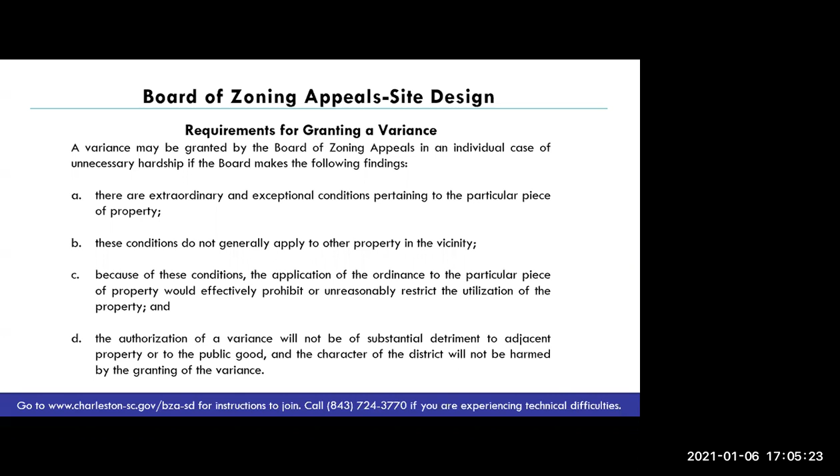For a variance to be granted, the Board of Zoning Appeals must make the following findings. A, that there are extraordinary and exceptional conditions pertaining to the particular piece of property. B, these conditions do not generally apply to other property in the vicinity. C, because of these conditions, the application of the ordinance to the particular piece of property would effectively prohibit or unreasonably restrict the utilization of the property. And D, the authorization of a variance will not be a substantial detriment to the adjacent property or to the public good. The character of the district will not be harmed by the granting of the variance.

Very good. Thank you, Joel. Order on each application. The chair announces each application followed by staff presentation and recommendation. Staff will call on applicant to present their application after being sworn in by the chair. Staff will open the public comment period to receive comments from registered attendees in favor, first spoken, then written. Each speaker will be sworn in by the chair. Staff will then recognize registered attendees for public comments in opposition after the speaker is sworn in, first spoken, then written. Staff will recognize the applicant for a short rebuttal, and then the chair will close the public comment period and begin board discussion.

Providing comment: if you submitted a request to speak on an item before the deadline, staff will call on your name when it is your turn to speak and enable your microphone. Your microphone will be disabled after you're done speaking. You may only speak once for each item, and you must state your name and address for the record, or you will not be permitted to provide comment.

Board discussion. Following public comment period, board members will make comments, ask questions, and make motions. After a motion and a second, board members will vote aye in favor or nay not in favor. If the vote is not unanimous, the chair will poll each member for their vote. The chairman shall announce the vote on the motion and the final decision on the application.

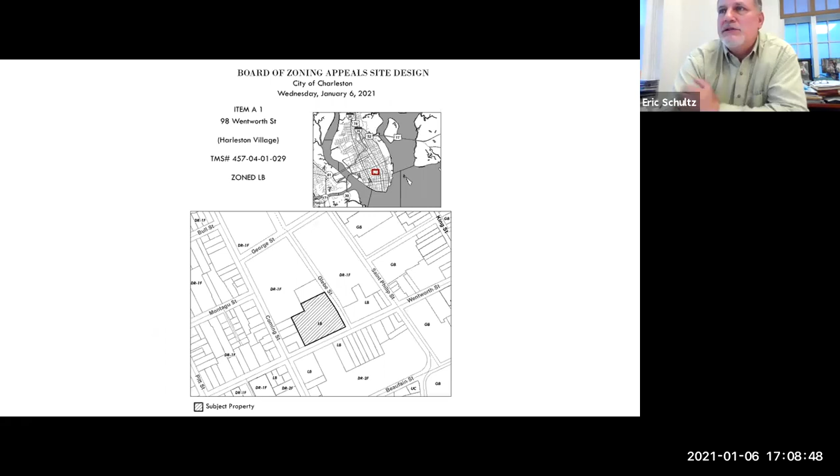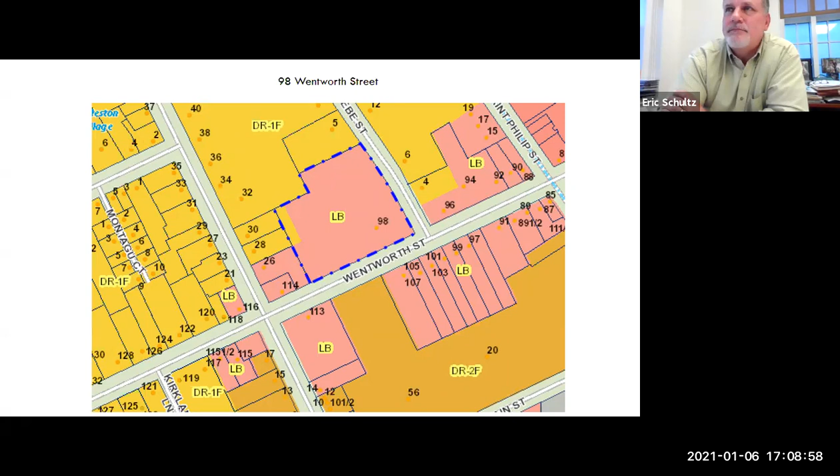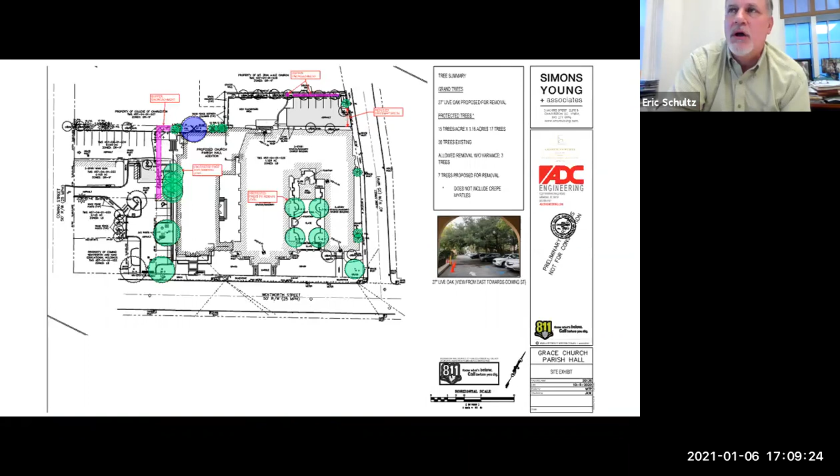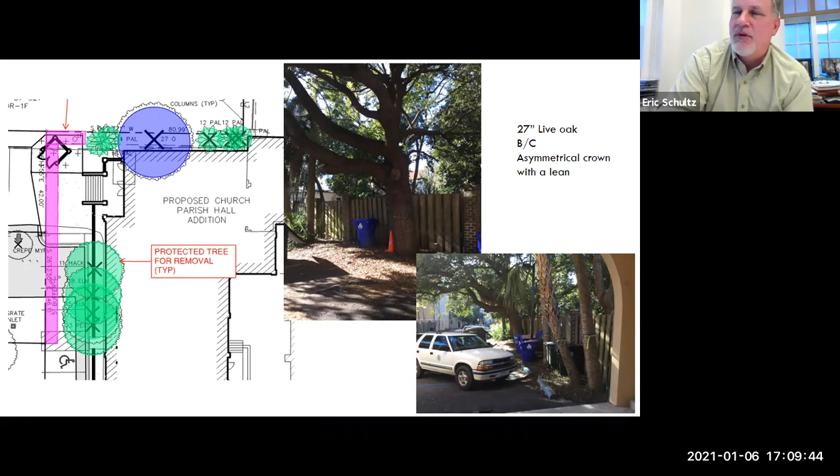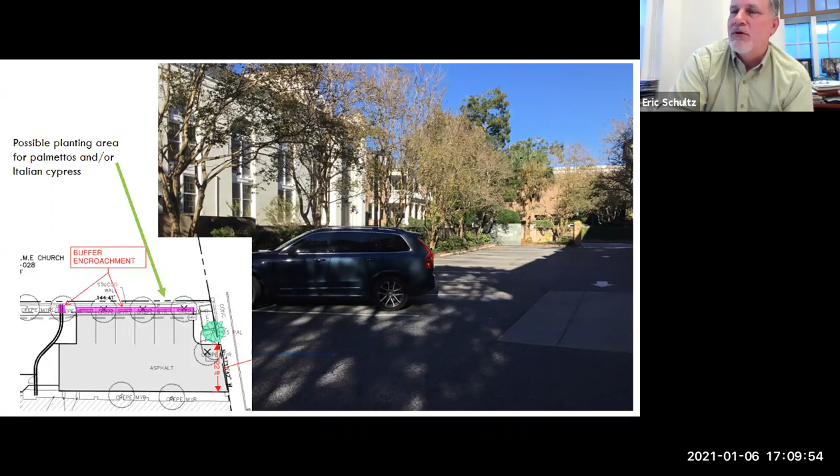This was an exhibit that I built for that other meeting, again, showing the 27-inch live oak, the trunk, and how the crown stretches into the existing parking lot, having an asymmetrical crown with a lean. This is a shot of some protected trees that were already addressed, and the small buffer area that was already previously addressed.

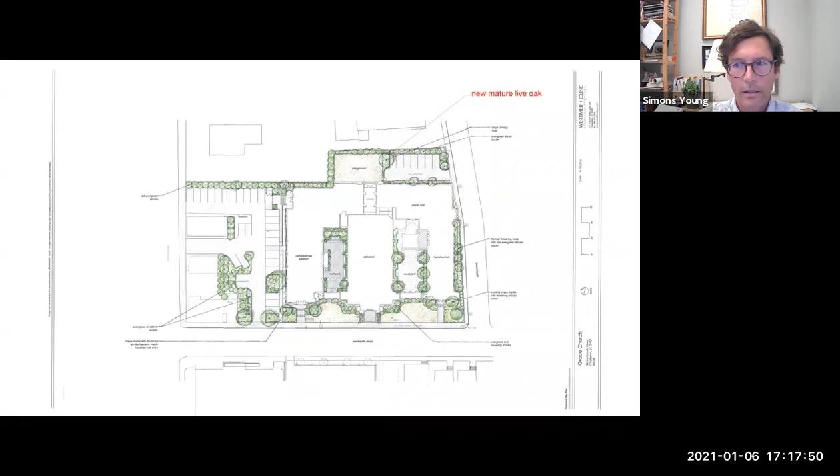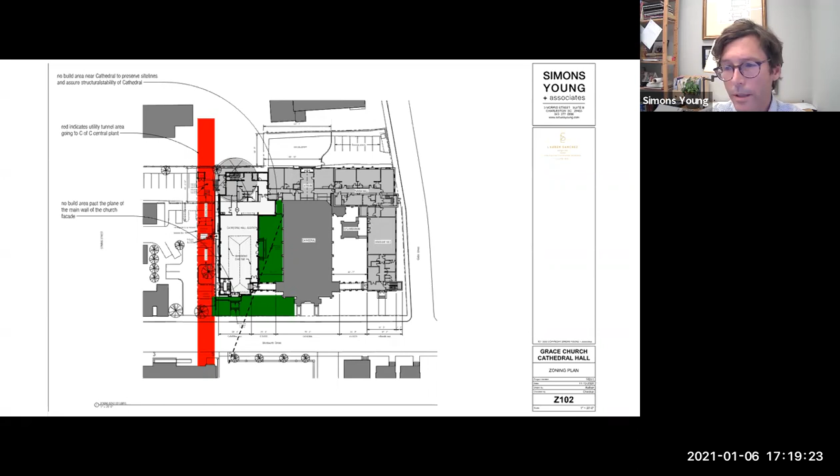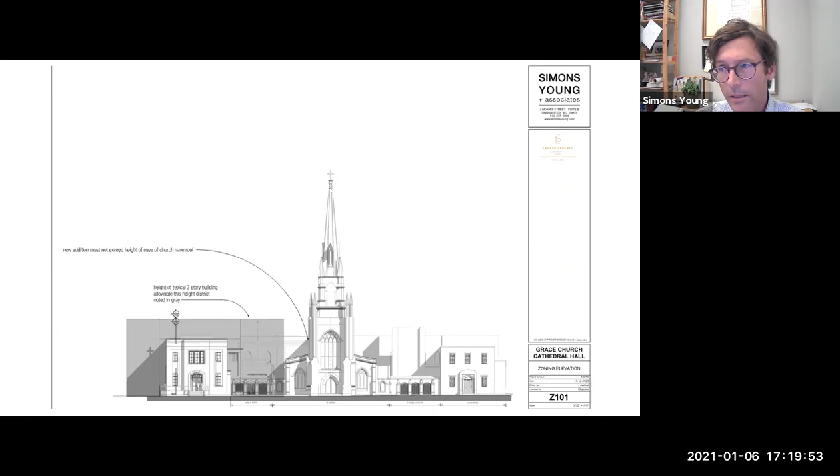Thank you, Simons. Is there a way that I can be increased to a panelist or whatever the terminology is? So... I'm not sure what you're asking, Brian. That was what I was asking. So you can see. That's it. Okay. Yeah. It just works better for me, I think, when we can all see each other. Yes. Gotcha. Okay. Thank you.

Chairperson Adrian and members of the Board of Zoning Appeals, I am Brian Hellman with Hellman, Yates, and Tisdale, 105 Broad Street. And I'd like to begin by thanking Mr. Schultz for his stellar overview of the application and the procedural history that brought us here tonight. And Simons, thank you for your overview. As Simons stated, I'll walk the board through the 4-part variance test and why we believe this application meets it, ultimately asking for your support and approval for this timely and important addition to the church.

Simons and the team have worked extensively with staff, with our neighbors, the College of Charleston, Harleston Village Neighborhood Association, and others to garner support for this project. And we want to thank everybody for their time and effort as well. Did I hear you correctly, Eric, that there was nobody registered tonight that was opposed to this project? That is correct. Nobody registered to oppose. Thank you.

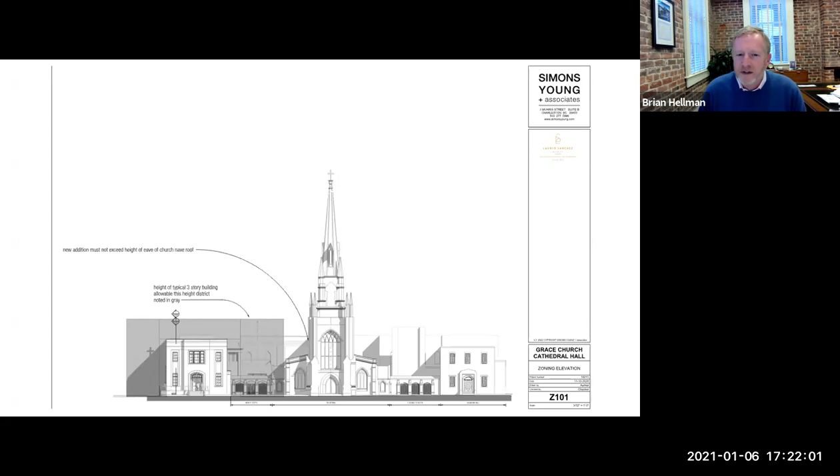So in South Carolina, to obtain a variance, an applicant must meet a 4-part test. We believe we meet this 4-part test for the following reasons. First of all, as Simons alluded to in his presentation, as did Mr. Schultz, there are extraordinary and exceptional conditions that pertain to this piece of property. They're the obvious ones, the lot size and shape, and how they're impacted by existing improvements. First of all, it's an oddly shaped lot, small and compact when one considers the membership of the church congregation, with only 600 seats, over 3,000 members, a preschool, and active ministry and outreach programs.

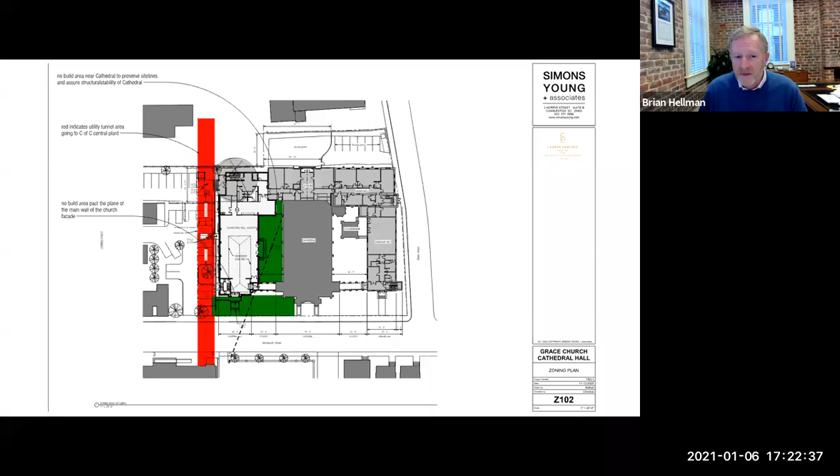To support these uses, as Simons also pointed out, the clergy offices and administration are located off-site in a separate building down Wentworth Street. A major goal of this project is to bring them all into one campus. That's made difficult by these extraordinary exceptional conditions, which are a function of the existing improvements. The Category 1 cathedral, rated the highest category in the city's historic evaluation system. Because of the nature of the historic building, the area in green where the sight line is shown is not only a gap for visibility, but it creates structural related issues, and the micropiles that are going to be necessary for the new addition must remain a certain distance away from the historic cathedral.

So it was constructed in 1848, and the 1855 plat shows the original church line on what was then 3 parcels. Over the years, the additions have been made to the west. Because of these existing improvements, the zoning ordinance imposes and the existing conditions create extraordinary exceptional conditions with respect to the siting of any addition. While, for instance, our zoning allows for almost 100% lot occupancy and a height of 3 stories, the proposed improvements may not occupy anywhere near that percentage on the site and are limited to 2 stories for the reasons that I had previously set forth.

The historic nature of the cathedral, the sight lines that Simons and Mr. Schultz pointed out, as well as the height of the cathedral. So under the city's ordinances that apply related to historic properties, the building must be shorter and smaller than the underlying zoning ordinance would allow. Additionally, this utility tunnel, what's in red here, owned by the College of Charleston, crosses through the western part of the site and makes building in that area impossible. So we're unable to build a wider building to avoid building the ADA and accessible areas in the back where the tree is because of this utility tunnel.

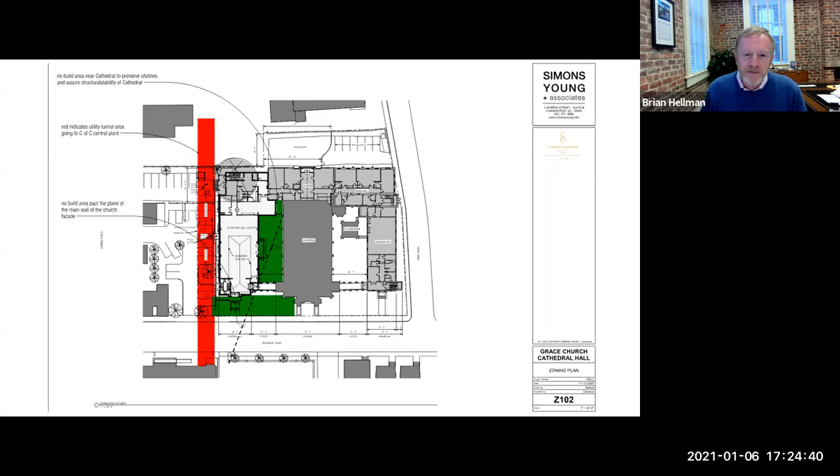The shape of the tree itself is also a challenge. It has grown mainly in one direction to the south, where it greatly impacts the buildable area of the site. According to my understanding, Mr. Schultz, this tree is at a C or a B- condition, and the roots continue to make the parking lot uneven. It regularly needs to be patched. The roots need to be shaved.

It's actually presently creating a somewhat difficult situation for the folks that are elderly and use that area as sort of an accessible way to get to the church as it is. It would make the area inappropriate for necessary emergency egress as people cross over it today or with the addition. So for those reasons, we think that we have some extraordinary and exceptional conditions specific to this property that do not, part B of the test, generally apply to other properties in the vicinity.

Specifically, the odd shape of the lot, the category rated historic building, utility tunnel, and the need for safe and efficient emergency egress. And for the reasons that we had stated already, part C, because of these conditions, the application of the ordinance to a particular piece of property would effectively prohibit or unreasonably restrict the utilization of the property due to the lot size, the shape, the restrictions, the 19th century improvements, the other conditions.

This single tree, which interestingly enough, the church having been there since the middle of the 19th century, we have this single tree that's probably maybe 30 or 40 years old that we're all here to talk about. It's merely a fraction of the age of the church, but this single tree is unreasonably restricting utilization of the property. And the last part of the test, that it will not be a substantial detriment to the adjacent property or the public good, and the character of the district will not be harmed by granting of the variance.

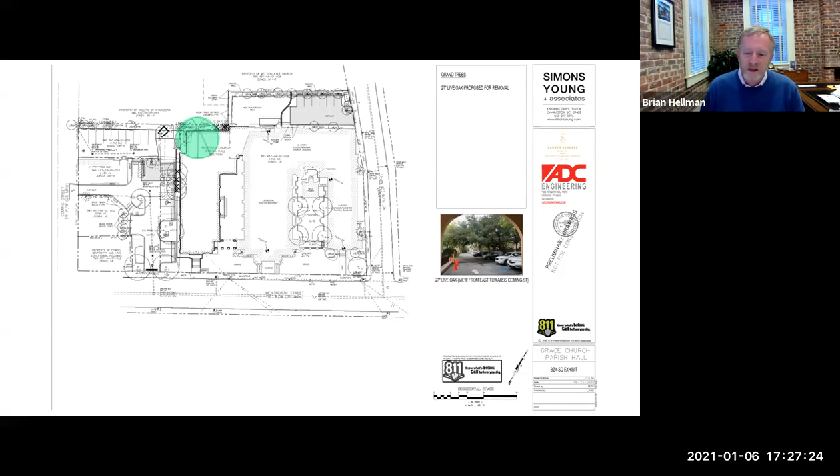Thank you, Brian and Simons. Is there anybody else that would like to add to the application, or Eric, do we want to unmute those that are present to speak in favor? I don't hear anything from their team, so we'll go to those that have registered to speak in favor. Number one would be Susan Carter.

Good afternoon. My name is Susan Carter. I live at 1155 Fort Lamar Road, Charleston, South Carolina, and I'm the senior warden at Grace Church Cathedral. Thank you all very much for considering. Ms. Carter? Yes. Ms. Carter, this is Chairman Adrian. I'm sorry to interrupt you, but I need to swear you in before you speak. So do you swear to tell the truth, the whole truth, and nothing but the truth, so help you God? I do. Thank you so much. Please proceed. My apologies. Thank you for considering our request for the variance.

The building that Simons and Lauren Sanchez have designed for us will certainly serve Grace Church Cathedral, but it will also be, we hope, a very, very important building to the community, to the college, to the village, to the neighbors. We have a very vibrant outreach, and we're excited to continue to grow that. We also look forward to planting a beautiful tree over the east side of the playground that will be much more visible to the AME Church from Glebe Street and from the back of the church.

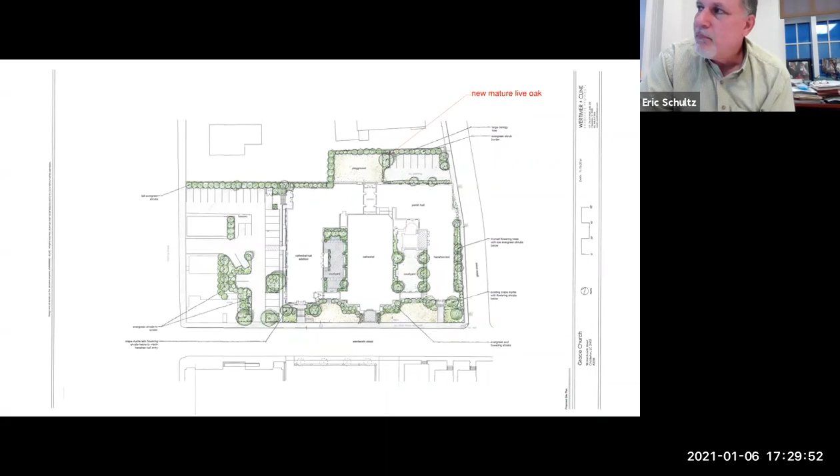Hi, it's Tu Lesher. Tu. Sorry about that. Excellent. Well, all right. Miss Lesher, let me swear you in, and then you can state your full name and address and proceed. Do you swear to tell the truth, the whole truth, nothing but the truth, so help you God? I do. Thank you so much. My name is Tu Lesher. I live at 67 Rutledge Avenue, just down the street from the church in Charleston.

I've lived in Harleston Village for now almost 15 years, and at the same time, a member of Grace Church. My children went to school there. I've served on the vestry, sung in the choir. And we have, as Susan has said, seen the church grow almost double in size, especially with the number of children and families with children that have been coming to the church.

We love this church and it's beautiful. And I think Simons and Lauren have designed a beautiful addition that will look very historic to the church. And I think what we will gain in architecture, not only for the church but for the neighborhood as well, will surely offset the losing of one tree.

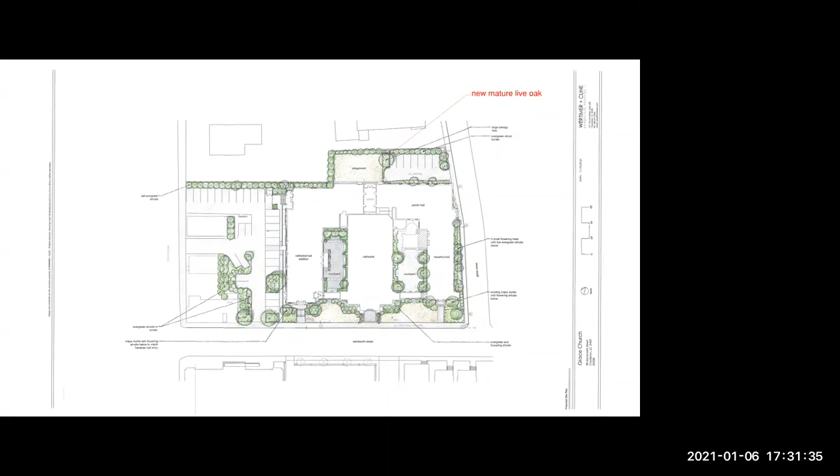All right, thank you. Mr. Schultz, is there anybody else registered in favor? Nobody registered in favor or in opposition. All right, then what I will do is I'll be closing this application to the public, and we will open it up to the board for questions or discussion.

And I'll start, and I'll say, I want to say thank you for the revised application and presentation. I think our largest hangup on this tree at the November meeting was justifying the hardship. And I believe that what we've seen today with the clear representation of the utility easement, the requirement for the separation from the existing structure, and all, in my eyes, it definitely demonstrates and shows that hardship present. But I'll open it up to the rest of the board if there's any questions that they have for the applicants.

Amanda, you got to unmute yourself. Amanda, unmute.

This is Amanda Barton, and I agree with what Joel said. I think you've proved the hardship, and additionally, the fact that the adjacent neighbors aren't opposed to it, and there have been no objections from the general public. I'm good with it. I think my question is what does a mature tree mean? What size? What are we talking about in the area between the parking lot and the playground?

We can unmute Cindy Cline for that, please. Cindy? She must be having technical difficulty. Simons, do you have an idea of?

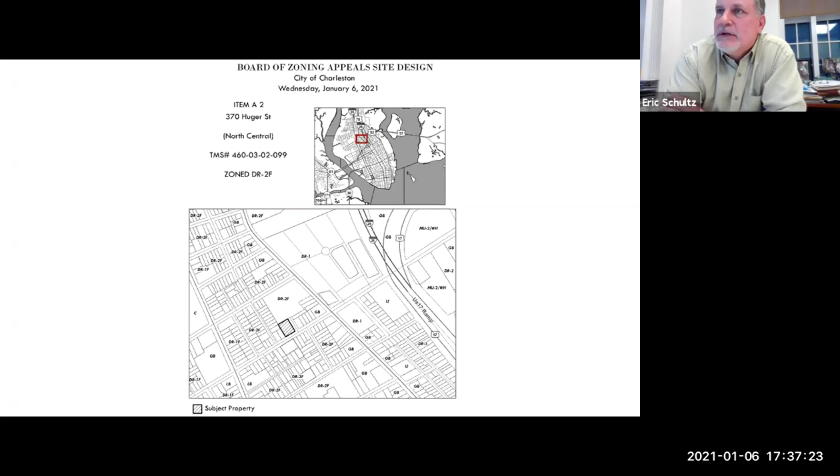Okay, this is the original application. Again, this was deferred due to a lack of a quorum. We're kind of moving up north on the peninsula to another historic structure. This justifies how they feel they meet the hardship test, and I'll explain it in a minute. 370 Huger Street is bound by Huger and also Shand Street. It's Firehouse number 8.

Firehouse number 8 is a very important building to the city. It houses one apparatus, but it needs to be renovated for seismic reasons. It's closed right now. I'm not sure where they moved the crew to, but after renovation, obviously they'll come back to this facility. It's centrally located on the peninsula.

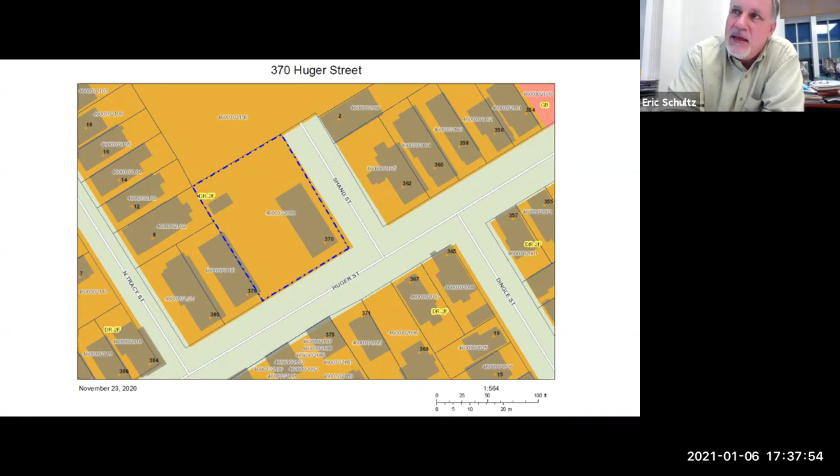This is an aerial shot. So basically you have staff parking on the west side, and behind the building, there's a gap in the wall on the west side of the property. The apparatus, I'm not sure if this is a drive-through or not. The applicant will have to tell you that. But obviously when the door goes up and when they receive a call, they exit on Huger. There is a sidewalk on the east side for that small dead-end street that leads into the school.

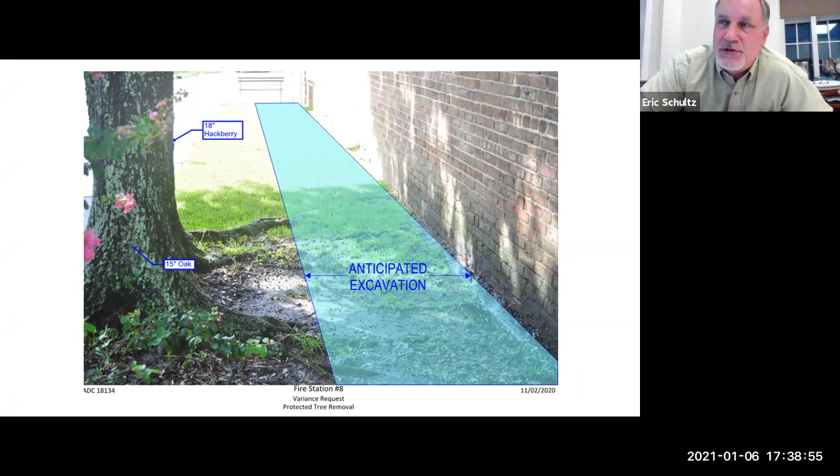And over the years, 2 volunteer trees grew on the east side, one being an oak, one being a hackberry. And in order to stabilize and do the seismic work for the foundation, they have to excavate on the east side. And as you can see, they would get into many, many tree roots, jeopardizing the stability of the tree. And again, the photos show that these trees are comfortable with one another, but they are of different species. So obviously volunteer trees, in my opinion.

And you can see the view looking south, the area that they have to work in order to stabilize that historic structure. One being an 18-inch hackberry, the other being a 15-inch laurel oak. Staff recommends approval with the condition to plant 10 caliper inches. These are protected trees, so it's 5 inches per protected tree to be planted on site.

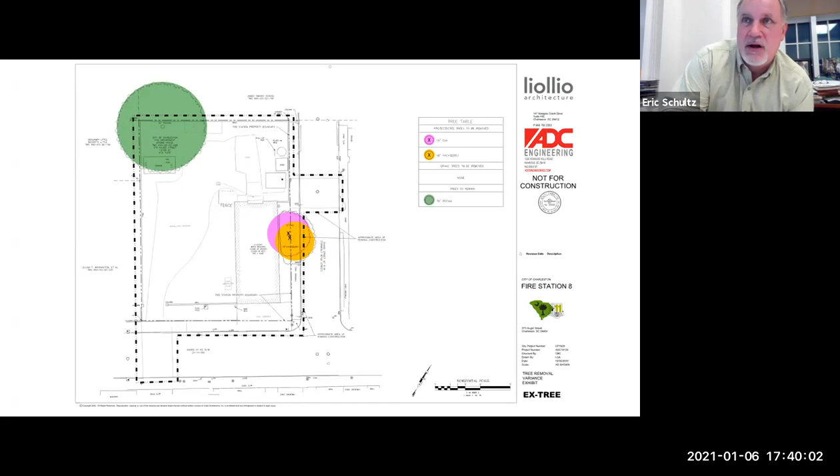And with the improvements, they are improving. I apologize, I forgot to add that exhibit. Oh my goodness, but they are formalizing the parking lot on the west side instead of just having gravel. They're adding the necessary generators and emergency equipment to keep the station up during an event. But there you have it.

So with that said, we need to unmute Edmund Most with the city, Gary Jensen with ADC Engineering, Brian Stowe, and Chris Cook, and Matthew Compton with the city. Not sure who's going to take the lead. I'll pick on Chris Cook. Chris, can you hear us? I can. Did we all need to be sworn in at one time? Yes. Is that the entire team, Chris? I'm sorry, did I leave anybody out? No, that's everybody. Okay, very good.

Thank you. All right, well, I'm gonna swear y'all in. If you would just one at a time say your answer, but do you swear to tell the truth, the whole truth, nothing but the truth, so help you God? I do. I do. All right, anybody else? There's only 2 I do's. I do. Okay, if everybody has been sworn in, then I guess Mr. Cook, if you would, the floor is yours.

Well, thank you very much. And I think what I will do is, realizing that we have Edmund and Matt on, I might give each of them, Edmund first, maybe. Edmund, was there anything that you wanted to say before I give a very brief additional description of what Eric has already provided? Was there somebody I missed? Was there an Edmund that was supposed to be unmuted as well? Edmund Most, yes. Okay, that's the one I missed. All right, sorry. Okay, I wasn't aware that I was going to be unmuted. Can you hear me? Yes. Okay, Edmund, it's fine if you would like, we can just go ahead and proceed on if you did not.

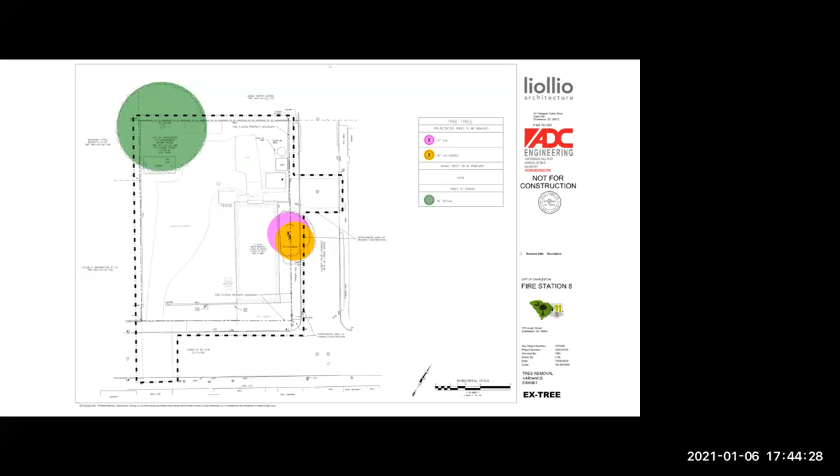So this is Chris Cook, address 1226 Yeamans Hall Road, Hanahan, South Carolina. Real quick, I think Eric has presented it very well, and Edmund's additional comments. I think the key point is that the seismic upgrade that needs to be done for this facility, as shown in that photograph that shows that distance outside, with the structural engineering, we've worked very hard to minimize that area that we have to have. And that's as little of a space that they can go in, put micropiles in to then get underneath this building and support it so that it will be able to withstand a seismic event.

The other item is just to the left of those trees in that photograph, the sidewalk is right up adjacent to that tree as well. So the sidewalk has actually been adjusted to be poured around those trees. So there really is no room if we were to proceed with this project without removing those trees. The damage to the trees would be significant, and not to mention, it would be really difficult to excavate as far down. That excavation has to go down approximately 4.5 feet to get the footing underneath that wall. So it is a requirement to seismically upgrade that building. I'll limit my additional words to that for now and be available to answer any questions or provide any additional clarification that y'all need.

Thank you. Eric, is there anybody registered to speak in favor or against the application? Mr. Chair, nobody registered to speak in favor or oppose the application. Okay, then I think that we'll close this application to the public. We'll open this up to the board for any discussion or questions they may have. I would say as chairman, I think that it's been presented well. I do believe that it's justified to remove the 2 trees, because of the sidewalk on the one side and losing the majority of the root structure on the other, I can't imagine them not being hazardous if they were still there after the foundation repair work.

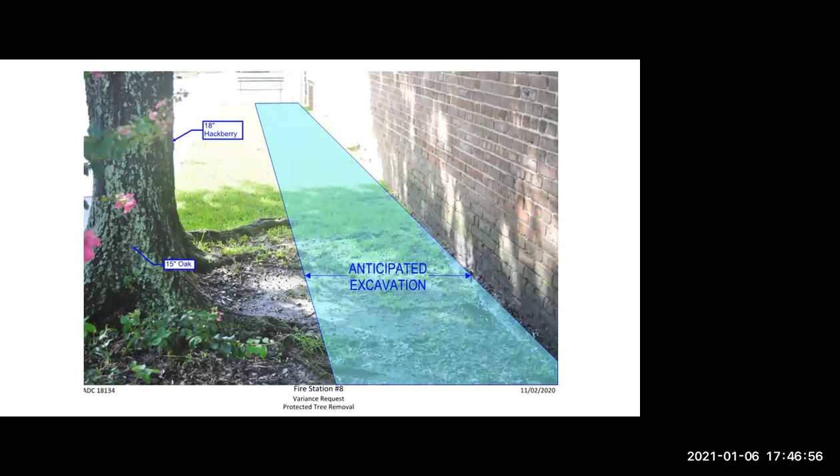Well, once you cut into those buttress roots, those trees are going to be a hazard. I'm fine with the motion, but technically once they have to fix that, those trees are hazard trees. Right. Technically hazard trees don't even require mitigation. So the fact that they're going to mitigate them, great. I agree. Any other questions or comments? I'd like to make a motion that we move to approve with board recommendations. Staff recommendations, sorry. I'll second that.

All right, so we have a motion on the floor for approval with staff conditions by Ms. Barton, seconded by Mr. Hargit. I will go through the roll. Ms. Barton? Aye, in favor. Ms. Murphy? Aye, in favor. Hargit? Aye, in favor. Mr. Yuji? Aye, in favor. Ms. Ravenel? Aye, in favor. And Mr. Adrian is also aye in favor, so this also is approved, the 6-0 vote. Thank you again for your time and application.

Which will bring us to agenda item A3, which is 171 Moultrie Street, application number 2101-06-A3, TMS number 460-000004. Request a variance from section 54.327 to omit the 15 protected trees per acre requirement, zone DR1F.

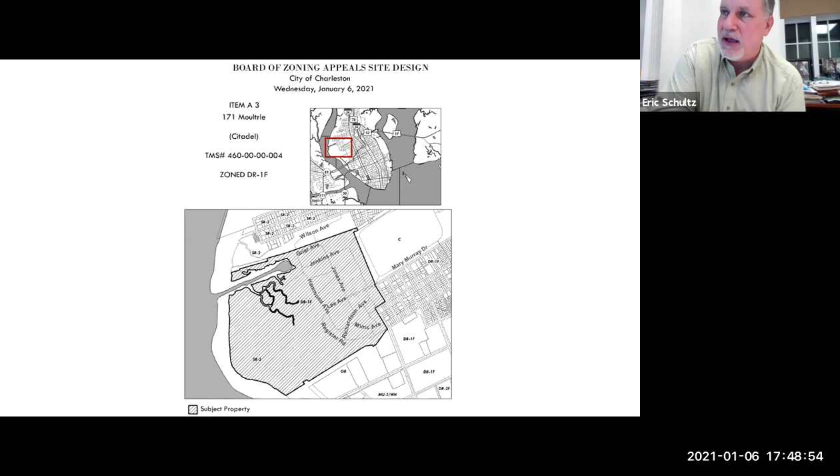Okay, 171 Moultrie. As you see on the application, it's 2 Lee Street. The Citadel has many addresses, but I know it as 171 Moultrie. It's used commonly, often, but here's the application. Again, this was deferred due to the lack of a quorum. Justification here for meeting the hardship test. Large Citadel campus, but we're going to focus in on the intersection of Moultrie where it then begins as Lee Avenue. So number 7 actually on this exhibit, or number 1, I guess, Lee Avenue.

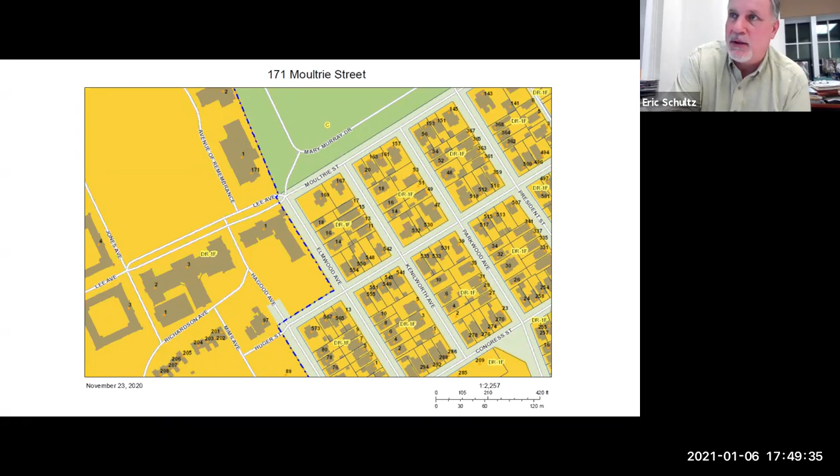This is Capers Hall. Capers Hall is an older structure, obviously one of the first buildings probably built on the Citadel campus, and it's beyond its functionality use, I would best say. ADA issues, classroom size, numerous issues. So they have obtained BAR approval to demolish that building and build back a new Capers.

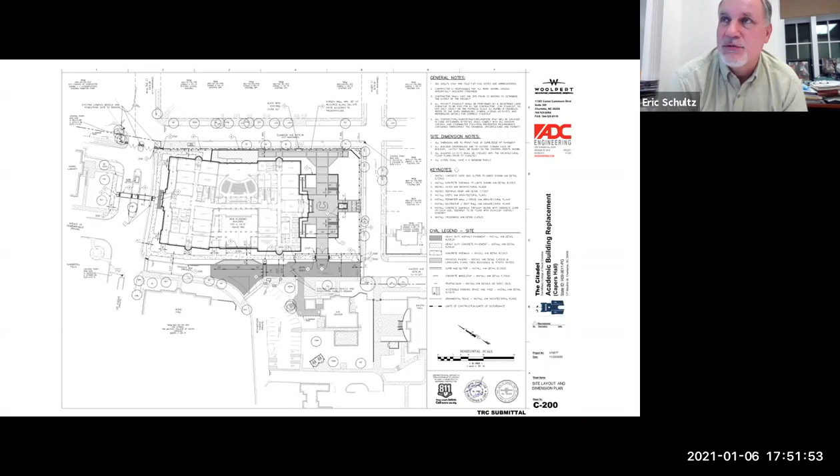This is the new Capers Hall. Obviously, the programming for the building is much different. Many more classrooms, corridors, a theater type, amphitheater type classroom, if not used for performances. Making a real presence on the Huger Street south side with a plaza, a gated entrance. They do need vehicle access to the east side, to the back of house, if you will, to that stage or that amphitheater component of the building. So there's a little access for delivery trucks and that sort of thing there.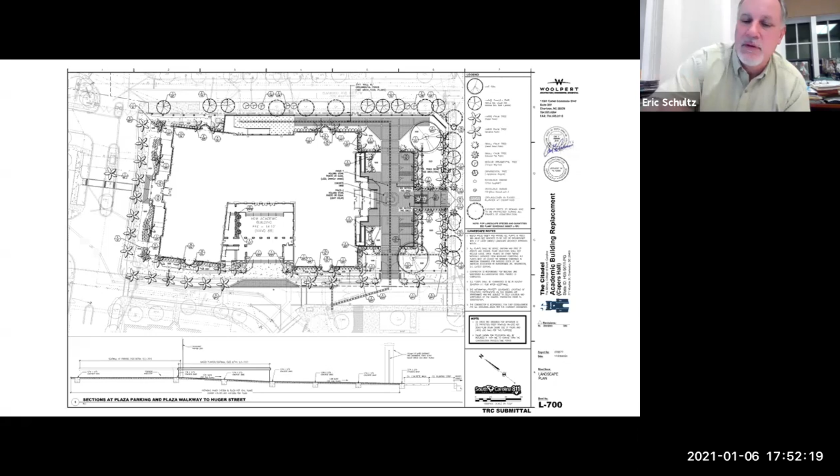Proposed landscape plan, obviously palm trees, really enhancing the edge along Huger and Elmwood with new street trees, new masonry wall and fences and that sort of thing, as well as canopy trees. This is the southern magnolia, as you see it. It's behind the bus station, between the chain link fence and the building. I think even to bring this building down, it would be really hard to protect it from falling debris and machinery.

Another view of how it's sandwiched between the fence and the building. The magnolias, again, they're in a verge or a green strip there. They're kind of funky, some of them bent, curved, different heights, but they have to pop those out. And then the landscape plan, as you saw, introduces new ones if these don't survive the transplant. Staff recommends approval with the condition to plant 15 caliper inches. That'd be 5 inches per tree. That would be 5 for the southern magnolia, 5 for each of the hollies, and provide a landscape plan indicating the locations of the relocated palm trees and mitigation summary for review and approval.

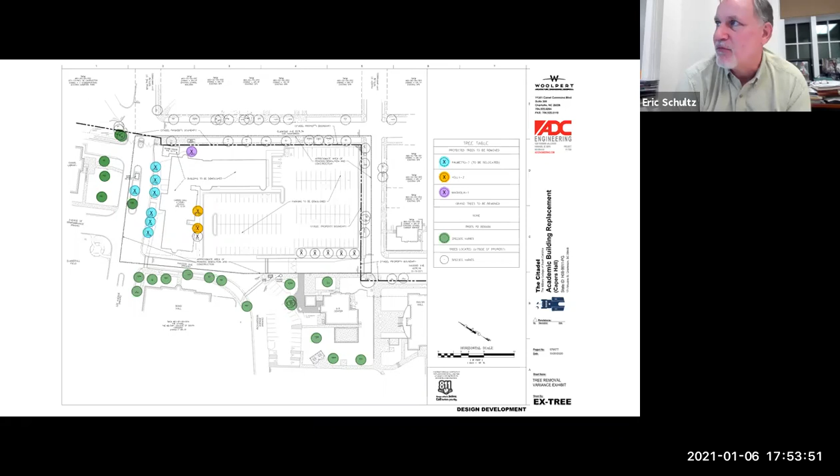With that said, we need to have Mr. Chris Cook unmuted, and Gary Jensen, Mark Brandenburg, I believe, is part of their team. Chris, who else is a member of your team? I'm not sure if Frank Smith was able to participate. Frank Smith, yes, sir. Frank Smith. Just to be available to answer any questions if they come up. Okay. So I think you have 4 of your members unmuted and ready to roll.

Okay, this is Chairman Adrian. I'm going to swear you all in. Do you swear to tell the truth, the whole truth, nothing but the truth, so help you God? I do. I do. I do. I do. Excellent. Thank you all for that. And Chris, the floor will be yours to start your presentation. Okay, thank you. And again, just in consideration of everybody's time, I'll try to be as brief as I can, and then, of course, be available to answer any questions.

As Eric mentioned, the improvement to Capers Hall is something that is desperately needed on the Citadel campus. That building was originally constructed in the 50s, and then an addition was done later in the 70s. But the classroom spaces, the study spaces were all built in that era to not really provide the educational needs and opportunities that are required on a college campus today. So this project really is all about providing spaces that are more appropriate for the current methods that teachers are using. It's not just classroom spaces, it's also offices for faculty. So it is something that is very necessary. As Eric mentioned, it's already gotten BAR approval for the demolition.

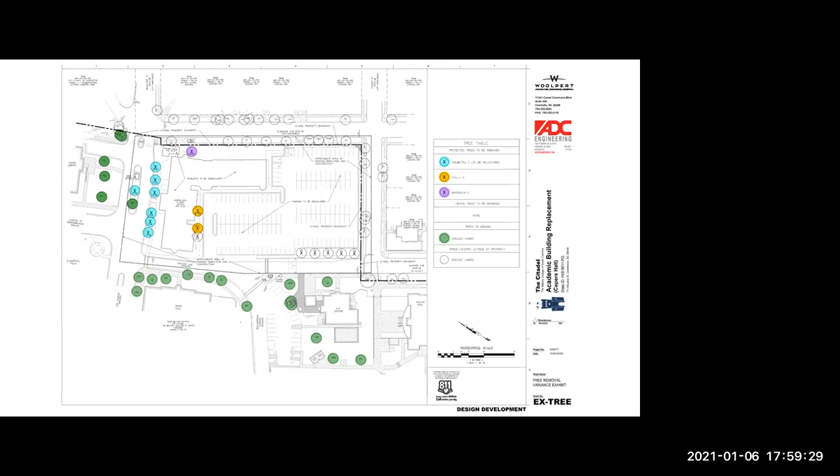Okay, thank you. Eric, is there anybody registered to speak in favor or opposed to the application? Mr. Chairman, nobody registered to speak in favor or opposed to the project. Okay, then we'll close this application to the public. It'll be opened back to the committee for questions or discussion.

And I'll start again and say that I personally don't see an issue with the application. I like the idea of the amphitheater and that space in the middle separating the two wings of the heated space. I think it'll be a nice improvement in that area.

I will say when I first saw that amphitheater and thought of it being a large auditorium, it gave me some nightmarish flashbacks to some horrible architecture theory classes at Clemson back in the late 80s, but I think I'm over that now.

So I'll open it up to the rest of the board if you have any questions. Okay. I don't see being able to do the demolition without losing these trees. So I think it just makes sense. Is the plaza area going to be open to the public? It looks like it is.

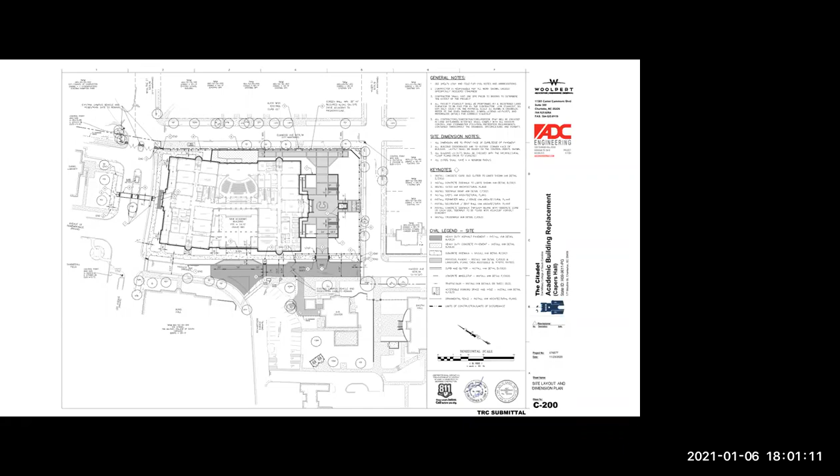Well, Amanda, I want to clarify one thing too, to make it real clear. That is an auditorium space at the top part of that center part of the building. That's not an amphitheater. It is an interior auditorium, but below that, in the middle, that is the courtyard space.

But to answer your question specifically, Amanda, people don't realize, and it's something that this new Citadel leadership is working on, it's an open campus, so people are actually able to walk onto campus at any time. There's a gate there, but they're really there to answer questions and to help people as much as anything. So that space could be available for people walking onto campus. And that courtyard area itself is not inside of any doors that would be locked or anything like that. Okay, thank you. Sure.

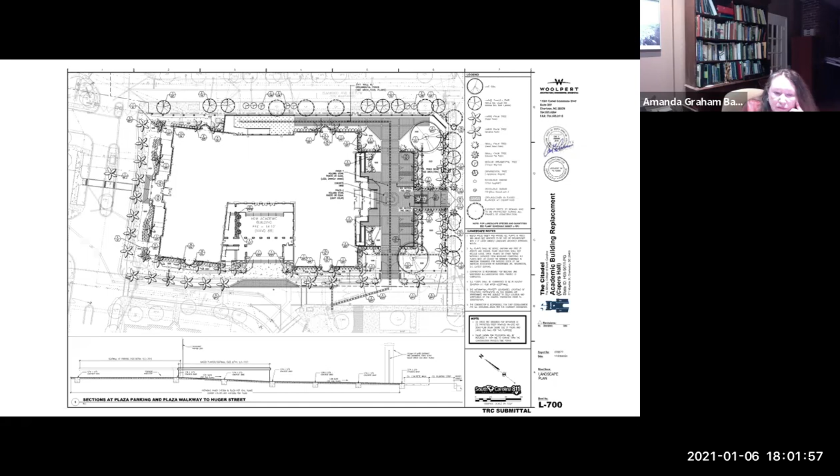Eric, the only thing that I would say, I mean, I agree with your assessment and so forth. The only thing that concerns me is we always talk about native trees, and the one thing that people could slip in there is red maple, which is technically considered a native canopy tree. Right. I think we have to be careful with that. I mean, I know we can't dictate, but yeah.

Right. Well, we kind of extend our powers during TRC, and there's locations where we will consider red maple when it's in a very open space with a lot of green around it. But in this urban environment, we would discourage that if it showed up on a plant schedule. I got you. Well, with that being said, then I would make a motion that we approve the staff recommendations. I'll second.

Did we lose Joel? I think Joel's on mute. Dadgummit. Sorry about that, y'all.

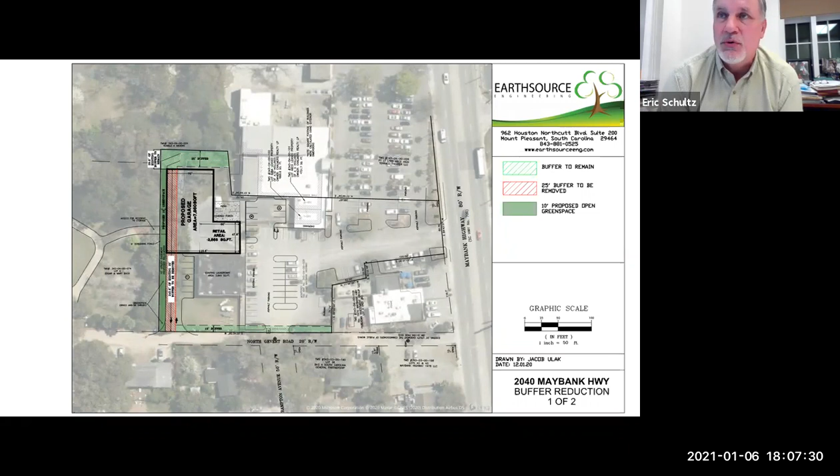The ordinance would only require a 5-foot landscape strip between vehicle use area and the abutting right-of-way line. But he's proposing a 10-foot buffer along North Gevert. The requirement is when you have commercially zoned property adjacent to DR, in this case, diverse residential, you have a 25-foot landscape buffer. So this exhibit shows the buffer line, and he'd like to reduce that by 15 and provide just a 10-foot.

And then as you see to the east, there's another residential property. He'll provide the full 25-foot buffer adjacent to that neighbor. Obviously, the garage is sized for whatever is going to be housed in there, and then the retail component out front. This is the back side. You can see the chain link fence in the back of the laundromat and the landscaping on his side of the fence property line, which I think was done by Wertimer and Klein. Palm trees, some ligustrum in there, thick hedge screening the back of the property, probably before his purchase. This is looking west. And then another view.

So because of the unique situation where we don't have a neighbor that would oppose this, staff is prepared to recommend approval. We are going to ask that he install a 6-foot minimum wooden fence along the common property line. You never know what the future holds. But to allow the access gate through that, and provide the detail, would have to be approved by DRB.

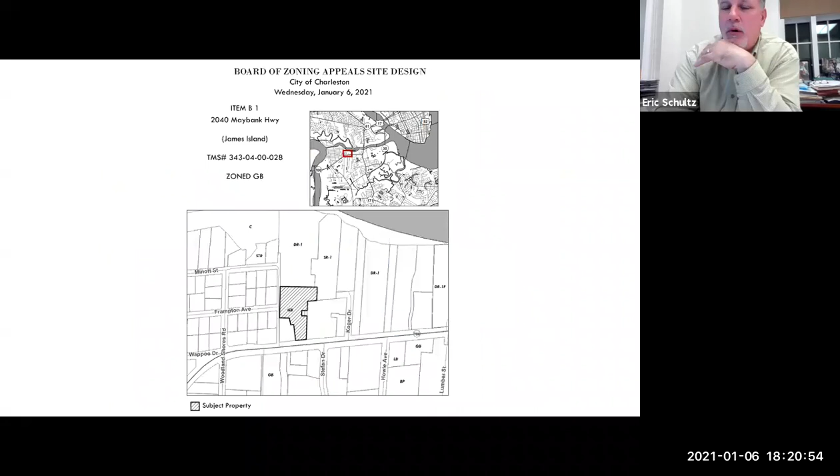No. No, I think if you look at his exhibit here, yep, that 25-foot view buffer extends past that corner of that dashed building. Isn't that line the continuing of the property line going back? So really there's, I don't know, 15 feet, 20 feet of his property that is technically only a 10-foot wide buffer. Is it not?

No, if I'm reading it correct, his dash line starts in the upper left corner there. It goes towards that light green hatched area, and then it jogs north of the page, so straight up, and then it cuts over to the right, and then back down at a strange angle. So I think his property line is at the edge of that 25-foot buffer, and it goes all straight back. Then it looks like it goes up towards where his name is on the page there. Correct.

So what I will say, Mr. Branch, do you want to clarify that? Yeah, you're right. The way you've got it, he's covered. We left the buffer as is, compliant on his side. And it might be appropriate to look at maybe one of the aerials. You can see there's also a very heavy vegetation buffer between. You can see the number of trees and green space that's already there along that 25-foot buffer. Even though it's not required between the two residential lots, it continues.

So we're not asking for a variance on his side at all. We didn't think that would be appropriate. So, because he's coming off of Koger, right? The neighbor. I believe he comes off... That's correct. No, he comes from the other direction. His access comes off Koger around the back. Yeah. And there's a heavy tree line in that corner, I guess on my property, that abuts his property, and there's a bunch of trees on his side as well. Or I should say on hers. Unfortunately, he passed in the last few months.

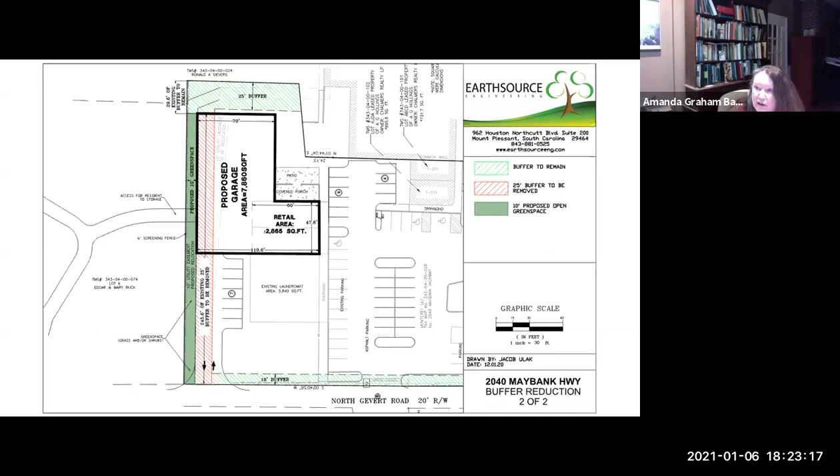Have you talked to them about this? I have not. And so based on where she lives and the way she accesses her house, she wouldn't have necessarily seen the notice. But this is one story, right? That's correct. Yeah, one story. And she won't even be able to see it. But if you go to the pictures that Eric put up there, you can see. There you go.

That's basically my maintenance shed. So you can't even see the neighbor, and the building would sit inside here. And you can see there's a couple of trees on this property that will fall in the buffer. So the fence line you see there doesn't represent anything. I put that up at one time too. There was so much unwanted activity going on in this back corner, that gave basically another separation between my residential property and this kind of parking area. Okay. I believe that the buffer is maintained appropriately on that residential property personally.

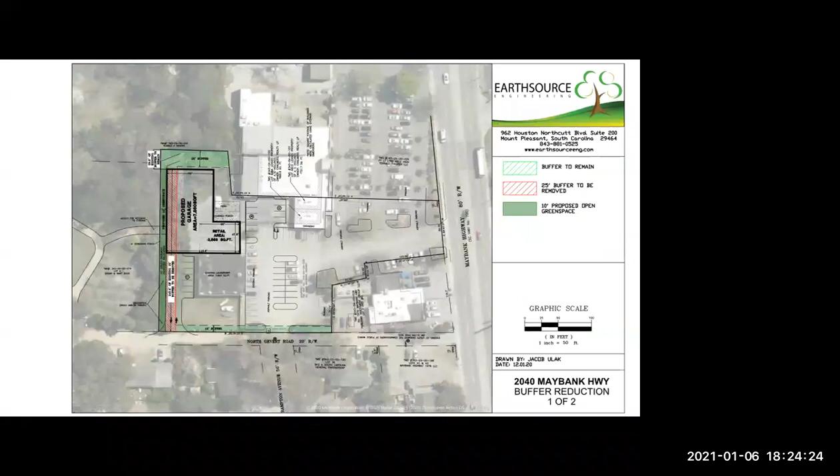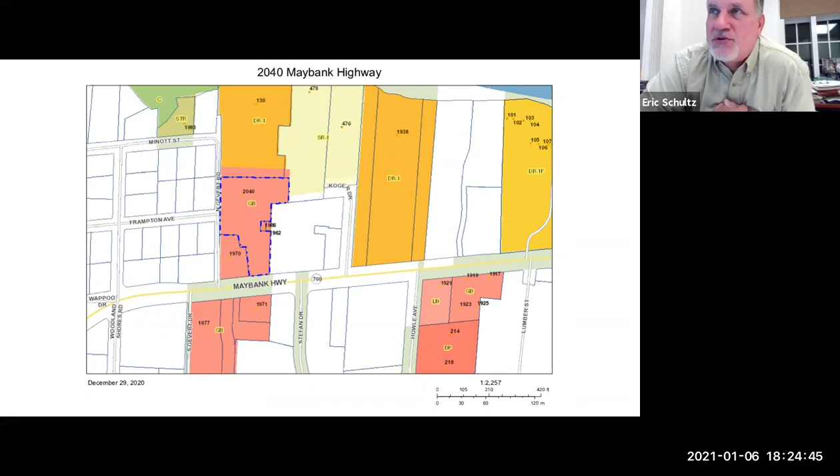Can somebody show me, like I'm 6, where this property line is? Because I don't get it. When I look at this map, now go back to that one, not that one. Well, look at this one, Andrew. See the blue? Yeah. See how that neighbor's property line jogs in and out along that western property line? Yeah, it looks like it cuts back, and I thought that's where part of that 10-foot buffer extends north. If you keep going up the page, it seems like he's got, I don't know, 15 or so feet along that 10-foot buffer. Granted, it's in the 25-foot buffer, but you see what I'm saying?

I mean, if he's to the left and he's looking at this, now he's only got a 10-foot buffer. Now, if he's above, or she, and is looking back down, of course he's got the 25-foot buffer. But it looks like it's 10-foot wide when you're looking at it from what is paper left. Or basically you're saying if he's looking across? So he's at the top, and it is throwing us off because we're looking at two different orientations, my plan, your landscape view, versus that other plan sheet.

So he's at the top of this. You can see his name, and that's his lot. His line's running left, which is running towards the Wappoo. So the only way he would see the building is if he's looking through Eddie's lot. Does that make sense?

Yeah, the dash line coming off of where it says 20-foot setback to the left of this represents the property line that separates Mr. Buck from the adjacent neighbor. Correct. That's it. And I see your point, Andrew. That's exactly it. If you went on this drawing, even from the back left corner of that building on a diagonal to the corner of where the property line is, it doesn't look like it's 25 feet. But it would be 10 feet wide, right? Yeah, but I don't know.

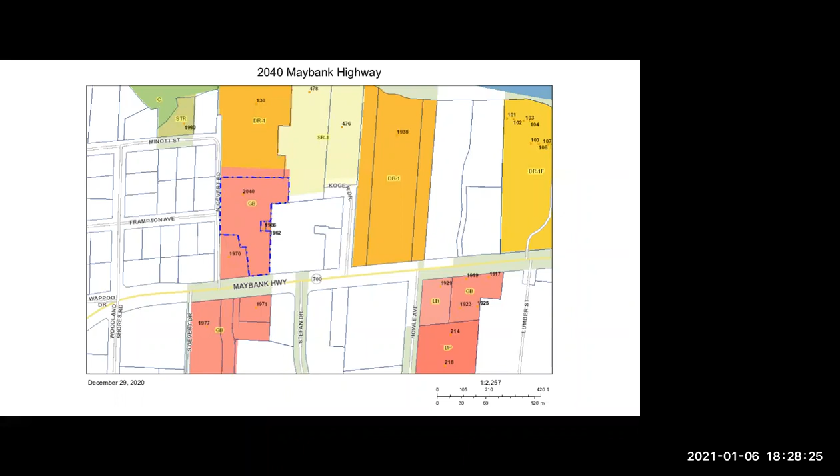Go ahead. So Eddie, I should know this because I live in Riverland Terrace, but I know the curb cut into the main part of the shopping center, but that other lower curb cut exists now, or is that new? It does. It's all gated now, but it does exist now, because I've got to allow access for the sewer. There's a sewer line that runs through there, so there's a gate and there's access now.

And actually that point, and my entrance down the street, are really the main access points. The quadruplex also accesses onto North Gevert, but directly across, the neighbor enters his property off Frampton, not off of North Gevert. That's an unimproved dirt road. Yeah. In some city research, it's labeled as a community road, so we're not even sure who maintains it. Nobody does. There's several of those over there, like farm to market roads and community roads.

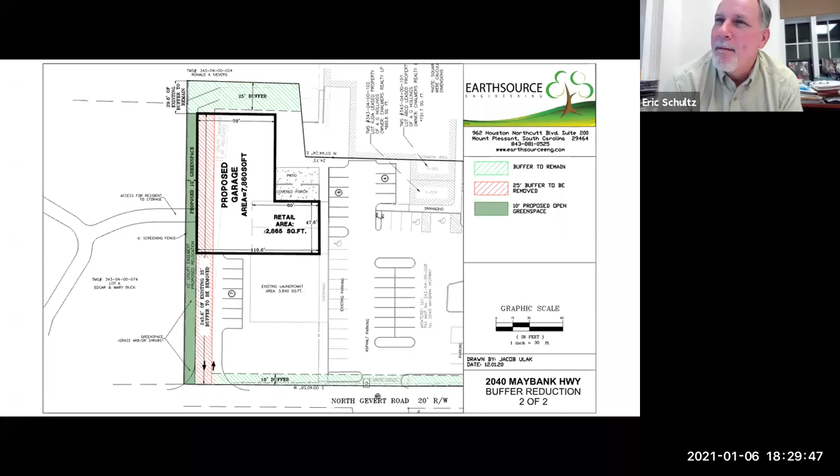All right. Any other questions? Is there a motion? I make a motion we move to approve with staff recommendations. All right. Is there a second to that motion? I'll second. That was Kelvin, correct? Yes. Okay. So we have a motion for approval with the staff recommendations. I'll go through the roll.

Ms. Barton, aye, in favor. Ms. Murphy, aye, in favor. Mr. Webb, aye, in favor. Mr. Hargett, I'm gonna abstain because I still don't get it. All right. Mr. Yuji, aye, in favor. Ravenel, aye, in favor. And Chairman Adrian is in favor also. So it's going to be 6-0 with 1 abstention. The motion is approved. Thank you for your time and application. Thank you for your time tonight.

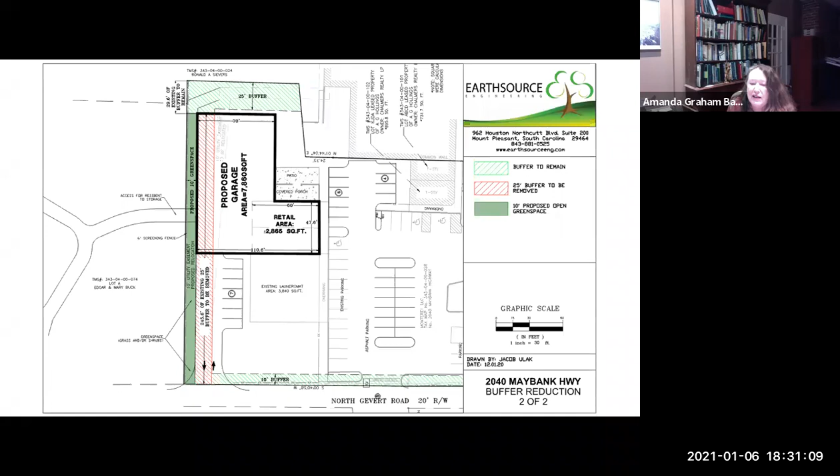I have a quick question. Are you going to be planting trees in what look like islands in the parking lot? Yes, the TRC requires that. The plan is to improve the parking lot as well. Great. All right. Absolutely. Thank you.

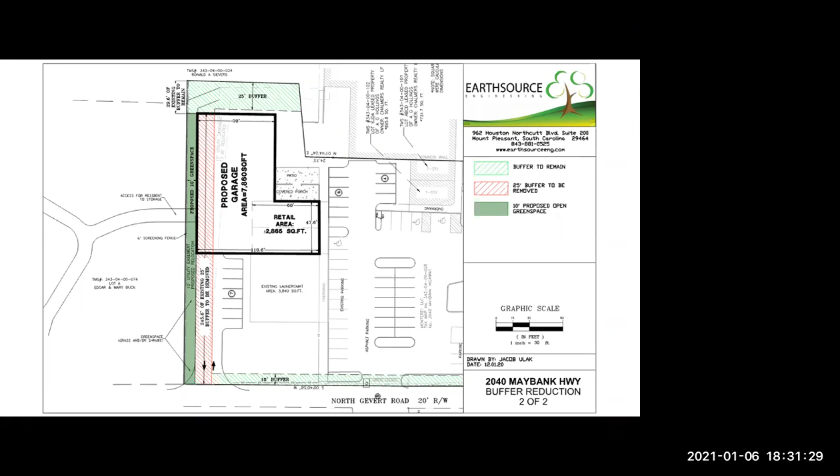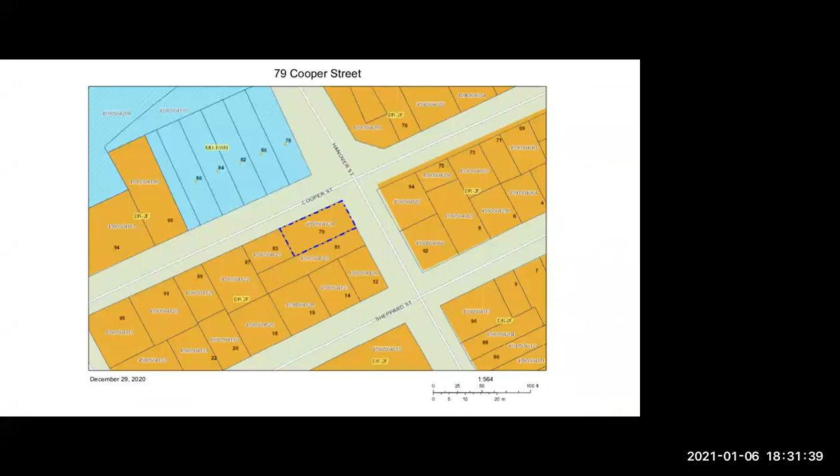So our next two items, B2 and B3, were both deferred, which brings us to the last item on our agenda, item B4, 79 Cooper Street. Application number 210106B4, TMS number 459-0504-124, requests a special exception from section 54.327 to allow the removal of 1 grand tree, zoned DR2F. Before we get started, Scott, I think Michael Kiefer would be that last remaining number. He was going to call in. He's with the city.

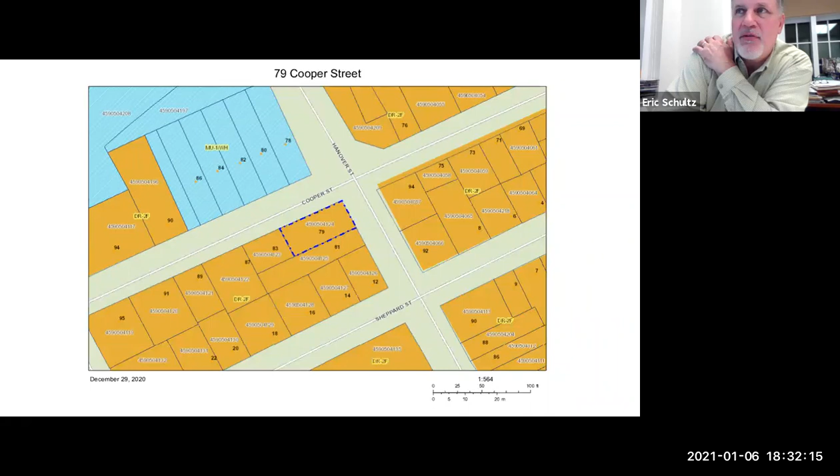All right, so city project, 79 Cooper at the corner of Hanover and Cooper, zoned DR2F, a vacant lot. The City of Charleston Department of Housing and Community Development is proposing to build an affordable unit here. Bartlett looked at this red mulberry. It's not a good red mulberry. As you can see, it sits on the southeast corner on the Hanover Street side.

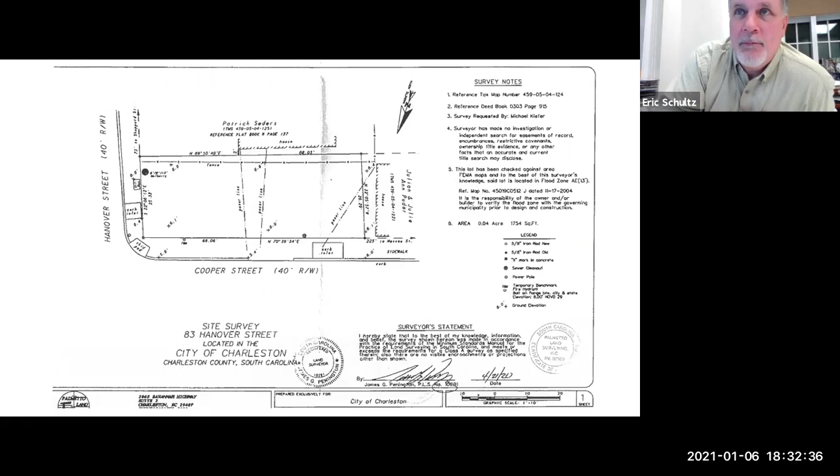You can see there, it's a multi-stem volunteer tree. Julia Martin is designing the single family house, pushing it into the corner. Obviously it will meet our vision clearance triangle requirements, but then the drive would be further from the intersection to the west with a side yard.

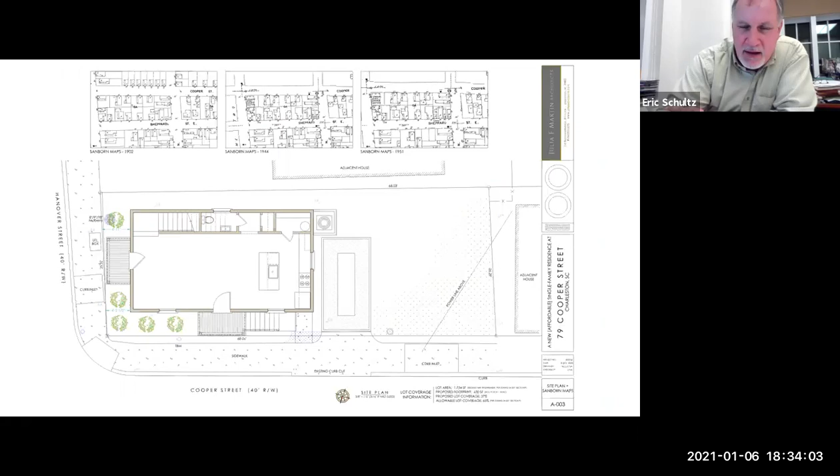All right. Michael, can you hear us? Mr. Kiefer, can you hear us? He said he was going to call in, so I assume that's him. I don't recognize the number. Yes, can you hear me? Yes. Good. Is this Mr. Kiefer? Yes. Okay, this is Chairman Adrian.

I'm going to swear you in, and then the floor will be yours. Do you swear to tell the truth, the whole truth, nothing but the truth, so help you God? I do. Thank you. If you'd state your full name and your address for the record, and then you may proceed. Michael Kiefer, 105 Rooster Ridge Road, Summerville, South Carolina, 29486. Thank you. You have anything to add, Michael?

No, as you stated, Eric, it's a tree in bad condition, and we're positioning that house where we are because we're trying to take advantage of that curb cut on Cooper Street to provide off-street parking. And so where the house placement is, where we want it on the lot, the tree is sort of getting in the way, and when we excavate for our footings, we'd probably be damaging the roots.

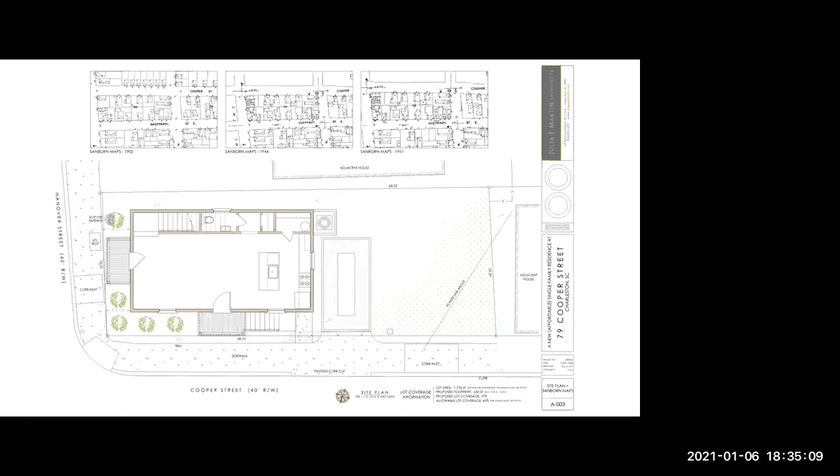Hello? Okay. That's good. Hello? Thank you. Yep. We hear you.

Well, Mr. Schultz, is anybody registered in favor or against the application that wanted to speak? Mr. Chairman, nobody registered to speak in favor or oppose the application. Okay, then we're going to close this to the public. It'll be open to the board for discussion. And I'll just start and say it's not a very good looking tree. So I don't have any issues with the application.

I would agree with that. And it's so close to the sidewalk and there's a utility box there. Not sure what it is, but the roots could potentially grow into that. It has terrible form. Yes. Any other? Go ahead. I agree. The tree is probably beautiful on the inside, Joel, but I'll make a motion to move for approval with staff recommendations. All right, so there's a motion for approval with staff conditions. Is there any other discussion from the board before we second? If not, is there a second on this motion?